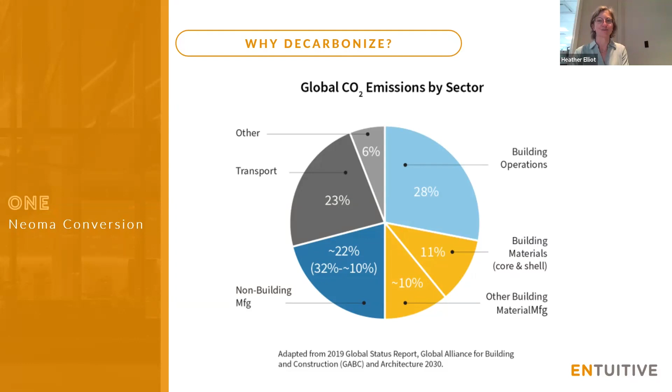Thirty million dollar budget, and that's sort of what prompted this conversion. That team came together. We knew that Home Space and In From the Cold wanted to take a look at Sierra Place. They had the property and knew they wanted to do something quite drastic with it, and they hired this team to take a look at it from a feasibility study point of view to begin.

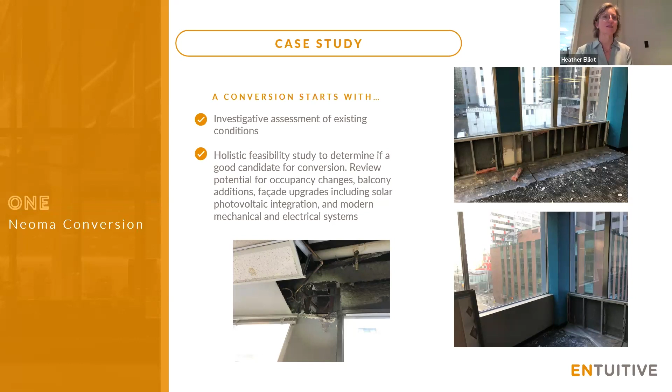And so what makes a good candidate? This one was interesting because the schedule was very aggressive, so funding on this project was subject to hitting some milestones. This was actually the fastest development permit and building permit in Calgary's modern history, fast-tracked because this building was a very good candidate and the city of Calgary specifically wanted to see conversions starting in the city. So that was a benefit that this project had.

But in terms of what makes a good candidate, you have to think about your limiting distance. How deep are the floor plates? Is that going to translate into feasible residential units? Do you have stairwell placement that will allow for your code required egress, dead end hallways, things like that? There's solutions if you don't have the floor plate, but they're going to impact building efficiency and potentially be troublesome.

The building envelope window wall ratio - this is key. Full replacement is costly. So if you were looking at a building, if there's ribbon or punch windows available, that would be easier and likely cheaper in terms of replacing it with operable glazing.

From a structural side, the building structural system is really going to drive the unit planning - what can you do from a residential unit perspective? Post-tension systems aren't a deal breaker, but they're going to require a very detailed map, and you need that post-tension system to be in good condition. Seismic and vibration behavior are also quite important. Retrofitting it is extremely costly, so if retrofit is not required or minimal, that makes a great candidate from a seismic perspective.

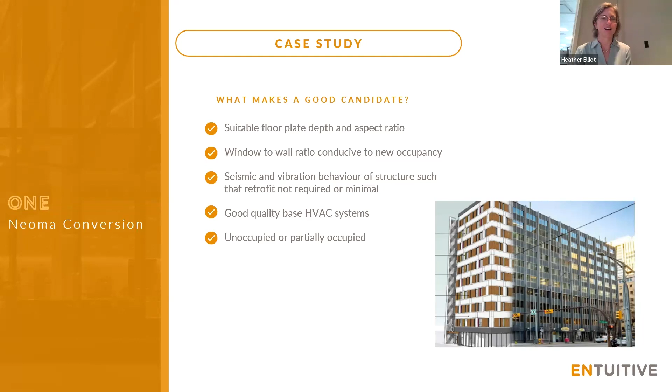And then the big one, occupation, or whether it's occupied. An unoccupied or partially occupied building would obviously be a better candidate for conversion. You can kind of see on the next slide, it's obvious - taking an existing office floor plate and converting it to residential while partially occupied would be quite difficult.

So Sierra Place was a great example of basically an empty shell that was just ripe for the picking. So it was a great candidate from that point of view.

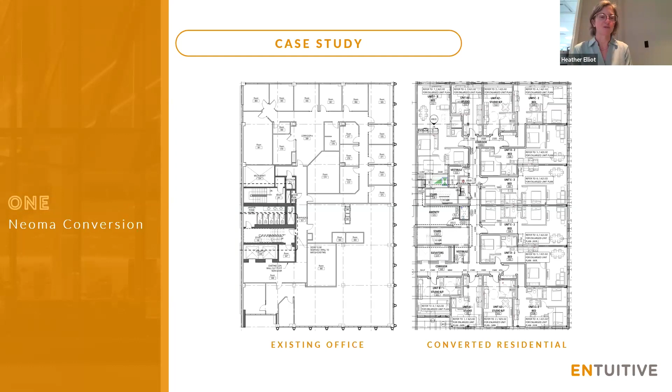So a couple challenges and solutions that we went through in feasibility, just as an overview from the building envelope side. The old curtain wall systems - that was really the big problem. I mentioned that what makes a good candidate is having ribbon or punch, because that way you can keep the efficiency and actually add an operable window relatively easily. In this case, they had older curtain walls from the 1950s.

They lacked thermal breaks, so they decided at the end of the day to replace those, but instead of replacing them in kind with another window wall or curtain wall, they ended up replacing them with new stud framed walls between floor slabs with an opaque cladding system. So we essentially took what was a full scale curtain wall style floor-to-height glazing system and basically created it into a punch opening system.

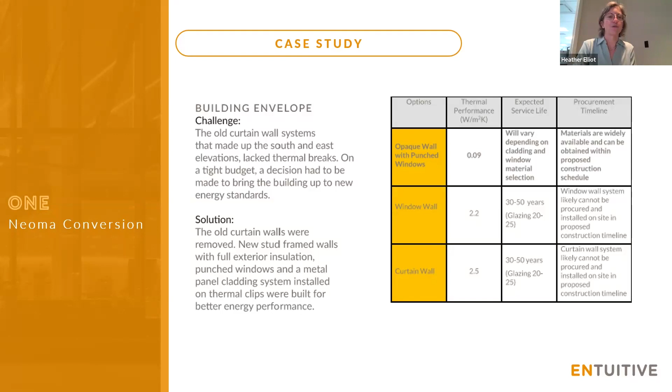On the elevations where there was existing brick and strip windows, those remained in place, just with new windows there. We completed isolated brick masonry repairs on those elevations - mortar repointing, isolated brick unit replacements, that sort of idea. And at the end of the day, the roofing was actually found to be in decent condition, having been replaced relatively recently. So there was a decision made to just replace the mechanical penthouse roofing system and leave the rest of the roof in place. But that's just one example of moving through different details.

From a window perspective, you can see the differences here - we've got a brick section as well as a typical wall section. So you're essentially rebuilding with an exterior insulated system between floor plates, where that detail on the right, detail 8, would have previously just been floor-to-height glazing. That was the big change here. And you can see on the left-hand side some of the revisions and alterations that were made for those new operable strip window style openings, between the existing brick, leaving the brick in place to be able to make that happen.

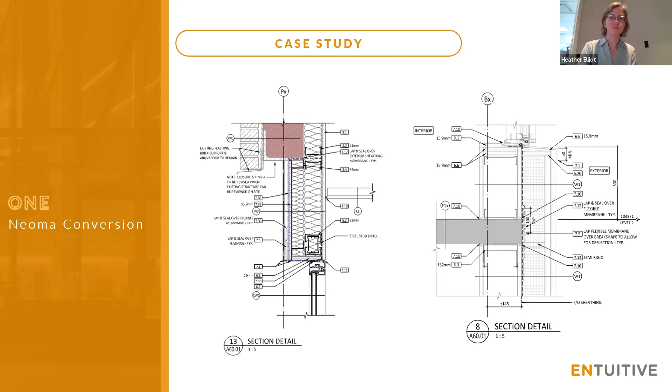And from that perspective, where does all of this feasibility information end up? One of the big deliverables at that feasibility study, or following it, was an energy model. Reinbold, our mechanical team, put that together.

For this project, the low-hanging fruit would have been, if we weren't meeting the targets we were planning to meet, even if the roofing was in decent condition, we could have added additional insulation to the roof and improved the envelope even further. That was our low-hanging fruit option. It was also run at the time of feasibility, and it was determined that at the end of the day we were getting the results we wanted, so we ended up moving towards leaving the existing roofing in place other than at the penthouse.

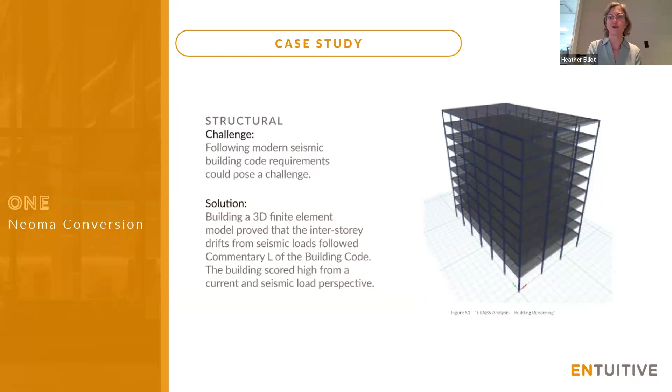So at the end of the day, the only recommendations we're really making structurally would be to repair members if we were to find any distress during demolition, for example. They did end up reinforcing some select members for localized infill, strengthening of the main floor framing, because it does change more to a retail style podium level, as you'll see in the renderings and final photos, and strengthening the roof framing for changes in loads, such as changes to the mechanical system, different units being installed, etc.

On the mechanical side, there were quite a few different options and things discussed during feasibility. This is just a snapshot out of the report, by no means all of the items. At the end of the day, really what they were looking at was demolishing everything in the existing basement, so all the mechanical systems just got taken out. They removed the existing rooftop air handlers and chiller, and ended up repairing an existing sanitary sewer service.

And then from a swap-out point of view, they were installing 3 new boilers, additional makeup air units for the stairwells and others, a new below-grade stair pressurization fan, below-grade smoke exhaust system, fire booster pump, domestic water booster pump, new hot water heaters, and then all obviously to accommodate the residential unit usage, you're installing new plumbing, distribution, in-suite heating, and ventilation, all to accommodate that new occupancy.

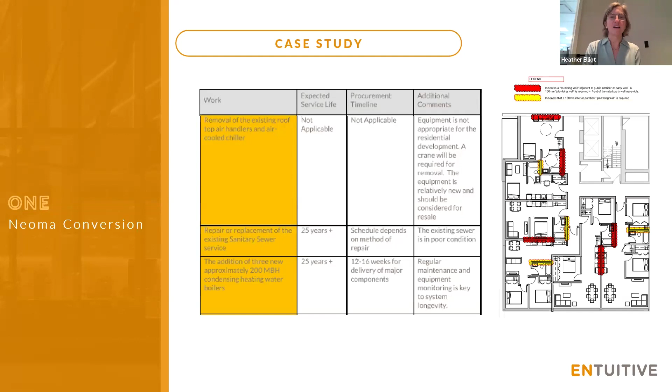So from that point of view, it's really a large overhaul of the mechanical systems. And so you're really just, again, looking at what can go, what can stay. You can see on the next slide here, just an example.

So there were certain things that they decided to leave in place. As an example, the cooling plant, the existing air-cooled chiller, was just left in place. So you can see if you compare the existing building to proposed, it's the same. Versus the heating plant, you can actually see the difference between the existing building with an 80% efficiency boiler, going up to 95% on the proposed building. So there was opportunity to make improvements, but where the system actually could be maintained and could work, they did leave some of the existing mechanical components in place.

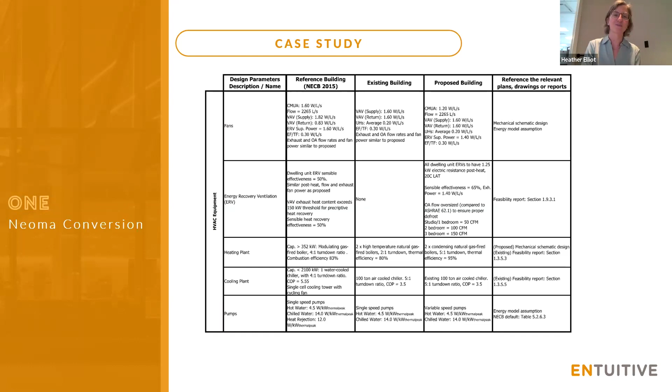Electrically, very similar story. We're looking at upgrading services, but also replacing the main distribution. Again, you're looking at shifting into a residential unit style occupancy layout, so a lot of changes have to happen for that. New life safety systems, backup life safety, common area lighting and power completely replaced, fire alarm systems completely replaced, security, access, communications, all completely replaced. So there's a lot of changes electrically that go into a conversion.

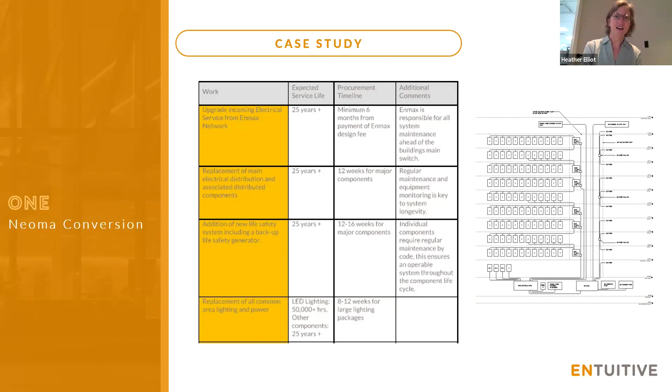And then from an energy modeling point of view, again, just a very simple snapshot. You can kind of see the difference between the reference building, the existing building, which in a variety of cases is poorer performing because some of these components are older, versus the proposed building, where in most cases you're improving your performance above the reference building and also above the existing building. So that was the aim here, was to do a complete mechanical electrical overhaul combined with a major envelope reclad, but with the benefit of not having to spend a lot of the budget on our structural system, since we didn't have to retrofit majorly.

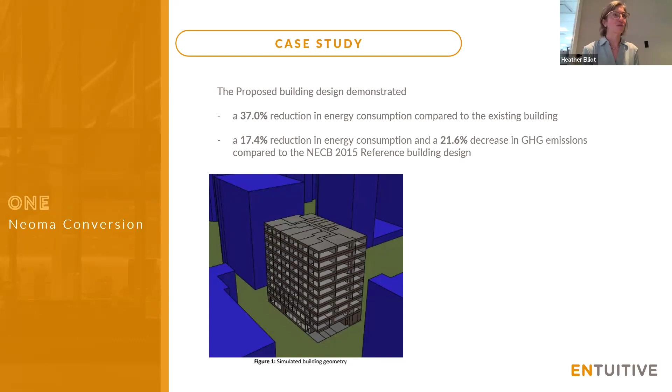At this point, PCL was actually already involved, and that was a great thing to have for a conversion. I think conversions in the future are going to know that having that contractor in at the beginning was paramount, honestly, because you're dealing with so many existing conditions. You needed someone to do that exploratory work who really understood what the existing building was like, and could actually price out and budget and understand what you were going to be doing as part of the conversion.

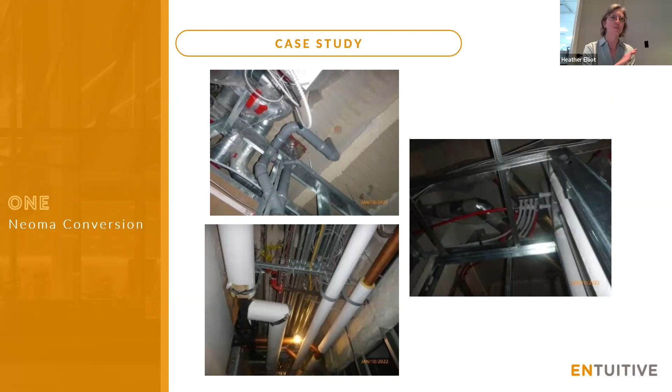So that's a little bit about Neoma. I'm just taking a quick look at the questions before we move on into Soble.

In terms of costing out a deep energy retrofit, we looked at it very briefly at the beginning, as a feasibility study. But it was determined that really for this project and the funding model they were going after, in terms of the dollars and cents they were hoping to be granted, they didn't have to go that far. So they backed off and said, we just need to meet these requirements - that's what we're aiming for to get our funding, and then go from there.

How's the baseline energy usage modeled since it was a different space? I believe the baseline was based exactly on that - it was based on an office space. So all of the existing building inputs were for an office space, versus the reference building, which I believe was considered like a residential reference building, if that makes sense.

Maybe I will come back around to other questions at the end here if I have time, but I will jump into Soble because I think some of these will get answered as part of that.

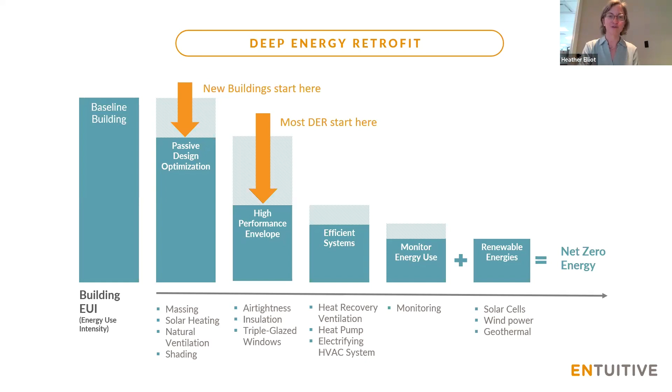Most deep energy retrofits kind of start one down because you've got an existing building. Maybe you can't change the massing as much, but you're focusing on air tightness, envelope, switching double pane windows to triple glazed, etc. And then you're moving down through more efficient systems from an M&E perspective, and moving towards renewables at the end. That's just a different way to think about a deep energy retrofit, but they all kind of come out to the same end goal.

And this is one of them - this is the Soble Tower transformation, a groundbreaking project in Hamilton, Ontario. This is a post-war apartment tower that went through a deep energy retrofit, and at the time was the largest EnerPHit retrofit in the world.

So they went through their own feasibility study that included: what if they sell it? What if they rebuild it, a complete demo? What if they go through major capital repairs, rehab, etc.? At the end of the day, they opted to retrofit the building because they could see they could make significant improvements at a fraction of the cost of a new build. So the budget on this was actually $35 million to begin.

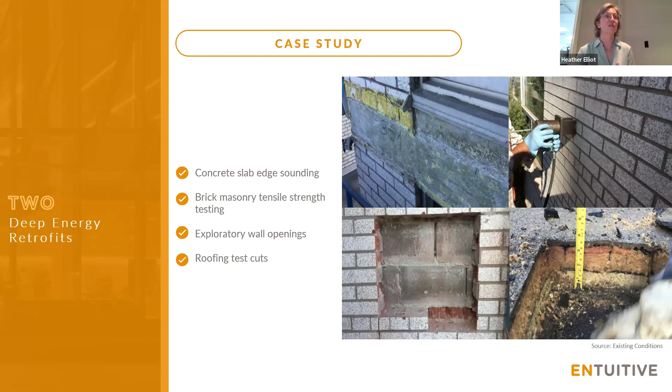Where it differed from Neoma is because they were targeting passive house certification, it becomes even more crucial that thermal bridging considerations are mitigated. So those were investigated. There was a lot of thermal bridge analysis continuously during the feasibility study and then all the way through design analysis to document what the existing project's weak thermal interfaces were, then balancing the impact on the project's total heat loss if you were to improve them, preserving thermal comfort, but avoiding condensation risk and all those other things. So there was a lot more focus put into this than there was in the Neoma conversion, just based on the fact that they were going for passive house certification.

Not only did they want to improve their thermal bridging significantly, you also have to show thermal bridge analysis for passive house certification.

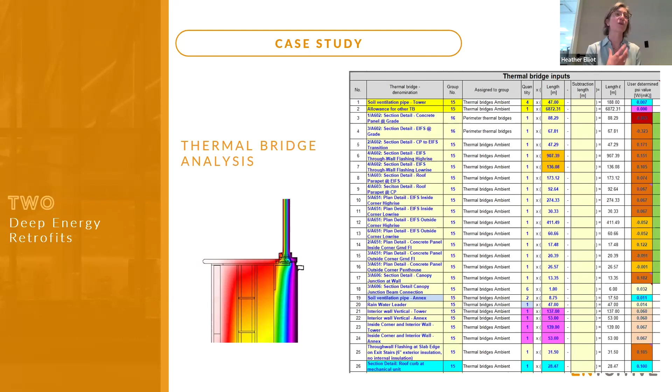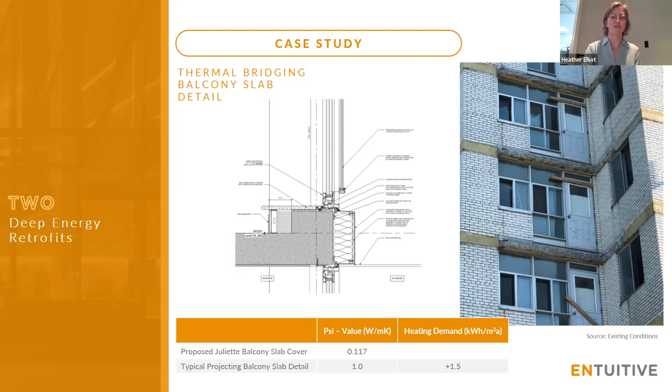There's a few construction milestones being shown here. Once old cladding and windows have been stripped out, they're replacing glazing with new fiberglass window assemblies in this case. Then there's actually a mineral wool installation with stucco cladding, or EIFS assembly - a mineral wool EIFS that was installed over the entire tower. At the end of the day, this came in at an R38 effective wall performance.

So you can compare that back to Neoma - it's about an R11 at Neoma, so that's a big difference. That's really where you see the major change in the end result from an envelope perspective. Just focusing on the depth of the additional insulation and eliminating those thermal bridging elements took that overall effective R value from the conversion style, where we were looking at R11, to a deep energy retrofit where we're closer to R40.

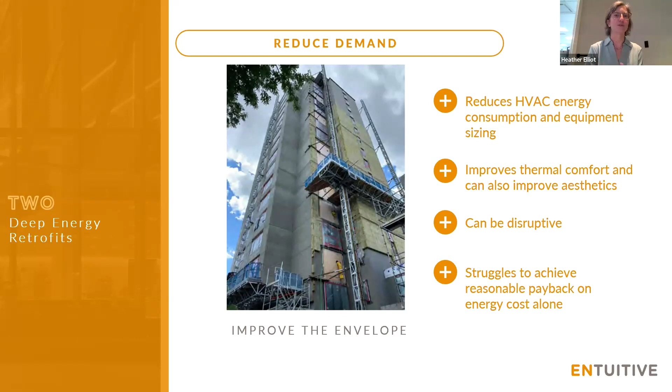So we need to reduce demand. We know this. We need to reduce our HVAC energy consumption by improving the envelope so that we can resize equipment. We know this improves thermal comfort, we know this is a great thing to do, but it can be disruptive. And the struggle in Alberta specifically is to achieve a reasonable payback on energy cost - that can be the trickiest thing for us.

From the improved efficiencies - now we're moving up a level. Again, heat pumps, switching from hot water radiator to panelized systems. This can be very impactful, but again costly, disruptive potentially, and sometimes it requires a new distribution system to achieve using those systems.

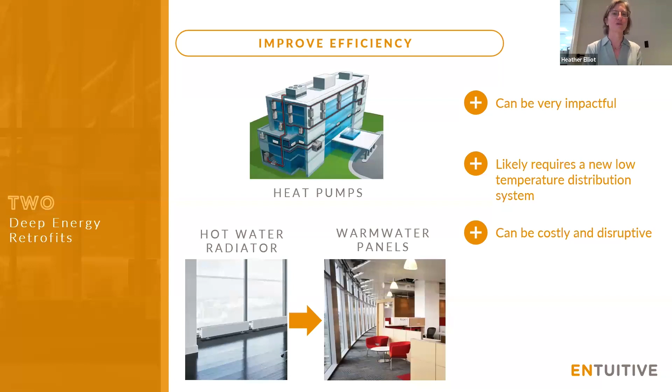Fuel switching, again fantastic - switch from gas to electric, great idea, but it can be impactful where a clean grid is present, and that's not always the truth, Alberta being one of those places. So it can be tricky to make this work on paper from that point of view. It can also require a change to your electrical service capacity, and your utility costs can be different from that perspective, especially in Alberta. So this can be kind of a stumbling block.

Renewables, we are seeing that, right? Solar is great, we see a lot of it being used, there's a lot of arrays out there, but it's the last step in a retrofit. I think that sometimes we get sidelined - it's like the solar industry did a really great job in advertising itself and getting itself out there, sort of saying, put solar on everything. But it's the last step. So you can have a really poor performing building with solar on it, and it doesn't really achieve the emissions neutral pathway that we're hoping to achieve. So that one's kind of tricky.

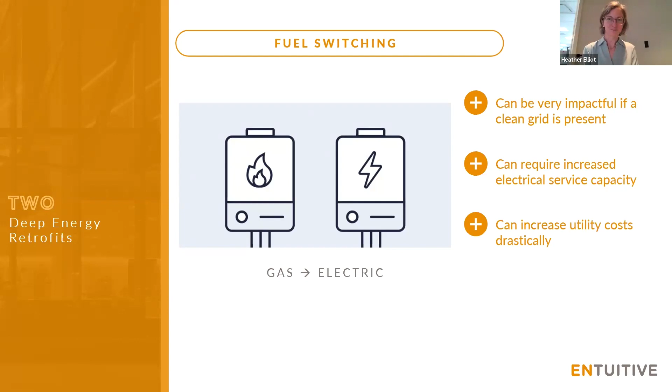So the question from me to you is, can we get similar results with less? What are we going to do? This kind of goes back to the idea of if we need to retrofit a building every minute, can we really retrofit every building deep energy? Probably not. We'd rather see 10 buildings get almost all the way there than see one building get a passive house certification. That's not to say I'd harp on it - working on a Ken Soble is fantastic, everyone wants to be involved with a project like that, and they're incredible - but can we do that for every tower?

Likely not. So I think we have to reframe our thought process from that point of view. I like this principle that was shared with me this year, the Pareto principle.

I don't even know how to say his name properly, but this is Vilfredo. He was an Italian civil engineer, economist, and philosopher, because back then you could be all of those things. He came up with the principle that 80% of the effort is the easy part, and that last 20% of the effort is the most difficult. At the time, he was actually looking at wealth in Italy, the idea that 80% of the wealth belonged to 20% of the population.

But this principle has been applied to a variety of different things over the years. If you're wondering where that notion came from, this is the guy.

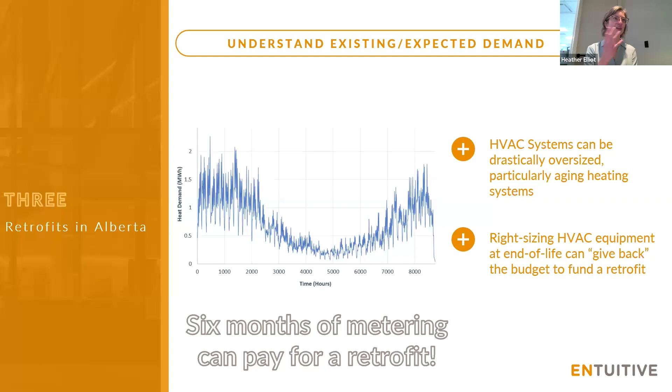completely recladding the building. Next step is set parameters, investigate your options. A big one is also to, at the outset, define decarbonization. What actually matters to the project? Are they like Neoma, where they were just going for a specific funding stream and only wanted to hit those targets? Or does the ownership have a different idea? That was really the big change between Neoma and Ken Soble. Ken Soble, the ownership wanted passive house certification.

They wanted to go down that road, but not everyone is going to be on board with that. Even from the mindset of using terms, a lot of people might talk about net zero, but what do they really mean by that? Are they talking about energy? Are they talking about carbon? I think it's really important to understand what the project is actually trying to achieve, and then set parameters based on that.

Another big part of this puzzle is feasibility studies. We talked about feasibility studies, and I've been part of many of them, but they can be like a $10,000 feasibility study or a $150,000 feasibility study. You really have to understand what you're asking for. Either the owner needs to know what they want, or they need a consultant team that can really explain to them what the options are.

That's the difference between doing a full-scale exploratory demolition mock-up, which is great when you're in an unoccupied building and maybe you can do that easily, but if you're looking at an occupied building, that's not as simple. There's a lot of things at play when you're talking about a feasibility study, what you're actually going to be doing as part of that, and what you're actually going to be delivering in terms of options and final deliverable for that owner.